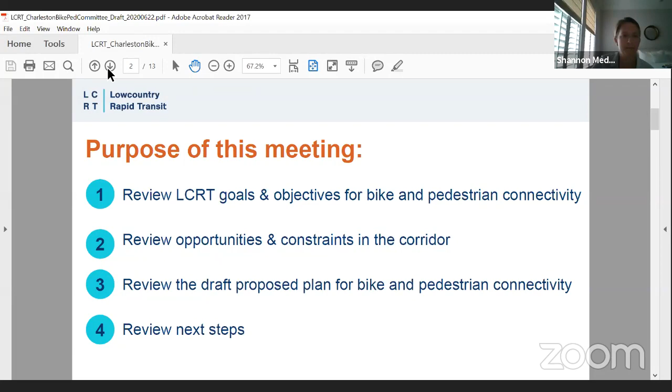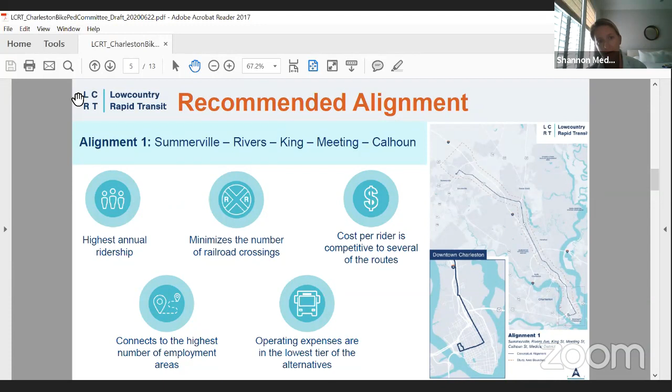Great, thank you, Shannon. Good afternoon, everyone. Thank you for the opportunity to be here. I wanted to go over the recommended alignment based on the purpose and need of the project and the goals and objectives that were developed.

We evaluated several alignments, and the recommended alignment that we've shared and gathered input on from the community is Alignment 1, originating in Summerville, traveling down Rivers Avenue, continuing through the King Street extension, down Meeting Street to Calhoun Street, heading west into the medical district there in the peninsula.

This is the strongest overall corridor in terms of overall ridership, minimizing the number of railroad crossings. The cost per rider overall was quite effective for this alignment. It connects to a number of employment areas, and the operating expense was also quite reasonable compared to all the other routes.

You get to see in the inset there sort of the alignment in downtown Charleston as part of the overall map.

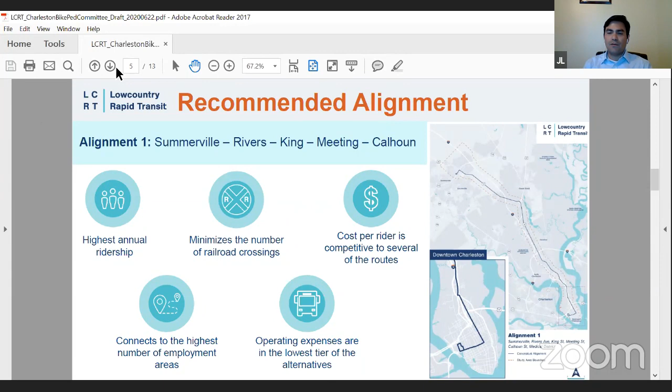So that's the alignment, and related to the overall goals for bike and pedestrian connectivity: as part of this effort, we want to provide safe accommodations for bicyclists and pedestrians along the Low Country Rapid Transit corridor. Right now, we're proposing to connect with bike and ped improvements from the peninsula all the way to Rivers Avenue, University Boulevard, north of the study area.

The intent is also for the bike and ped effort to be a catalyst for future bicycle and pedestrian improvements along the corridor itself, able to branch out for future improvements and connect to the bike and ped improvements proposed for the Low Country Rapid Transit effort, and lastly, to effectively connect the bicycle and pedestrian network to station areas overall.

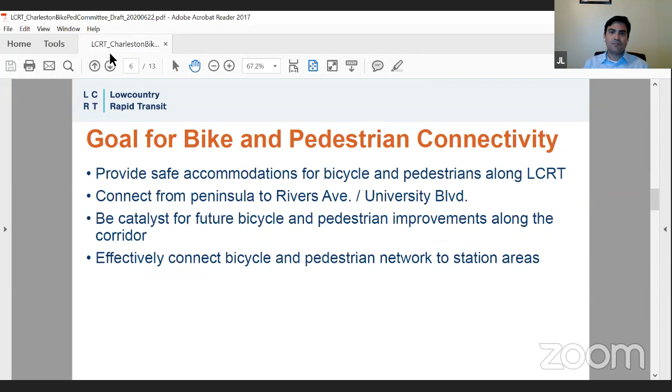So what does this mean in terms of the alignment? As you saw, there's one single alignment that we've identified. These are, if you will, the cross sections of how the roadway would be modified to serve and connect with the Low Country Rapid Transit effort.

Going from north to south, from Summerville into the peninsula, along the North Area 1 from Summerville, the BRT would be traveling in mixed traffic. As we start getting into the Trident Health area, we would have peak direction reversible lanes traveling in the median.

And as we head into the center area, towards North Charleston to about the neck area, we would have center-running BRT. As you see, both northbound and southbound direction would have a BRT serving that facility.

And pertinent to our conversation here, as we're entering the neck area, we would be traveling, as I said, on the King Street extension, connecting into the peninsula via mixed traffic. In the peninsula area itself, on Meeting and Calhoun to the medical district, it would be a peak hour reversible lane traveling overall in that area.

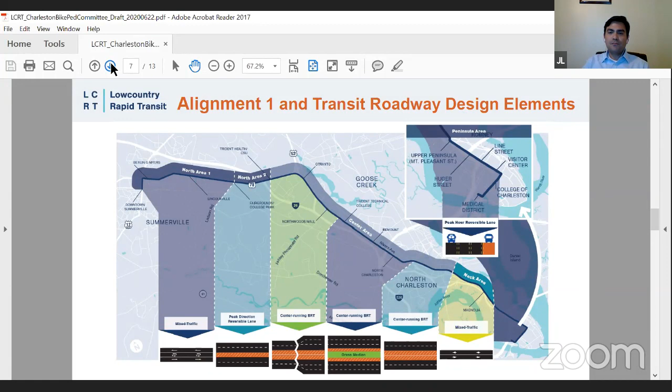And here I'm going to hand over to Kat Maines. She is with Alta Planning, and we'll be focusing, more pertinent to this body, on the improvements planned for the neck area and the peninsula area.

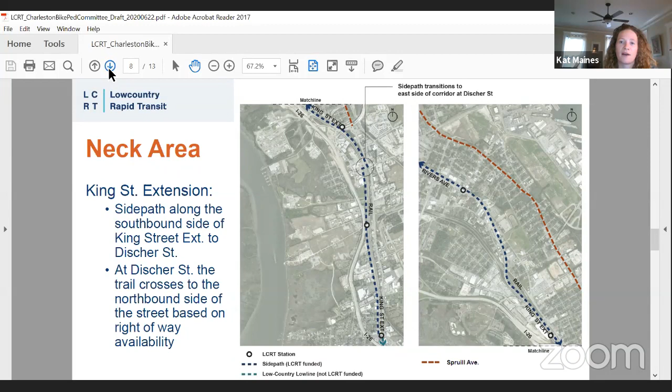At the very top of this diagram you see the blue line, which is the continuation of the side path on King Street extension. We also see an opportunity with the Low Line coming in, taking advantage of that really high comfort bikeway.

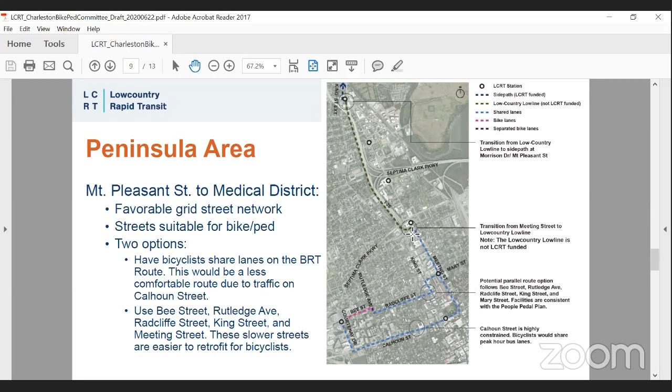The bikeway concept would continue down Meeting Street. This area is significantly more constrained than other parts of the corridor. Charleston is a unique area, especially on the peninsula, with tight right-of-way, lots of pedestrian activity, and historical resources that are non-negotiable in terms of moving them.

While the LCRT route continues down Meeting Street and Calhoun Street, there isn't a great way to accommodate a comfortable bikeway on those streets without significant investment and traffic lane removal, essentially road diets and changing how traffic operates there. Calhoun Street is one of the busier streets for getting people in cars into and out of the peninsula.

So we're considering some options for how to accommodate bicyclists on Calhoun Street. Regardless of what infrastructure is built elsewhere, Calhoun Street is still likely to have some bicyclists using it, so we're looking at options like great shared lanes sharing with transit vehicles and general traffic.

We're also considering other options that would change traffic a little bit. We know the People Pedal Plan designated a cycle track for that route, so we're considering the feasibility of how that could be accommodated and what impacts to traffic that would create.

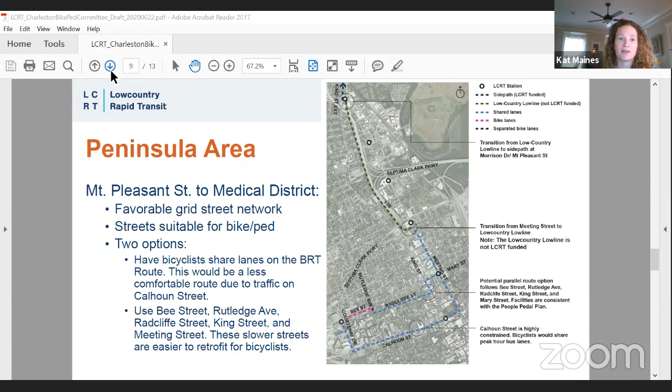So we see that as an obvious solution, maybe having less impact than what would need to be done on Calhoun to accommodate a really great bikeway. Next slide.

This is the short-term cross-section typical of most of the corridor. This isn't likely what it will look like along Meeting Street or Calhoun; this is more for north of where it connects from the Low Line.

We're aiming for a 10-foot shared use path with a 5-foot minimum planting buffer, consistent with national guidance for mixed bicycle and pedestrian travel. Where speed limits and clear zone regulations allow, that buffer could include trees, and it might be wider in places with additional right-of-way.

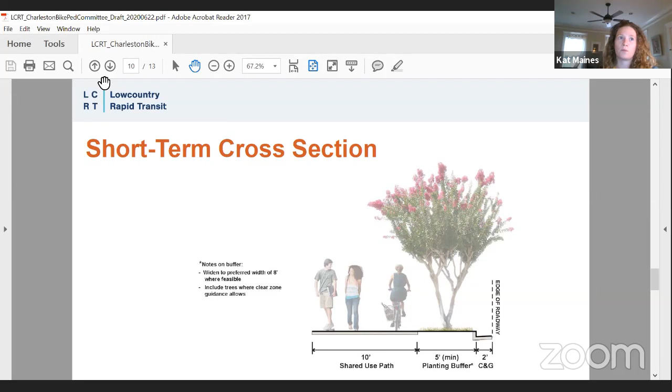For both the shared use path width and the planting buffer width, we want to get maximum width possible, but 10-foot and 5-foot is the typical that will be part of the design throughout the corridor. Next slide.

This shows one of many options for how that short-term cross-section could evolve over time. It could be widened to 12 to 14 feet, or as shown here, the modes of walking and biking could be separated from one another. In this configuration, the initial shared use pathway is instead designated as a bidirectional bike lane, with an additional sidewalk and buffer between those. This might be appropriate where there are long stretches of redevelopment and a lot of activity, where it doesn't make sense to have bicyclists and pedestrians doing the same thing. Overall, there are lots of different ways that cross-section could be evolved in the future.

Perhaps most importantly is getting it onto both sides of the street, where we're only able to get it on one side today. So all this is to say that we are committed to getting this continuous shared use path throughout where the transit improvements are going to be made, but that does not preclude future improvements from happening along the corridor as well.

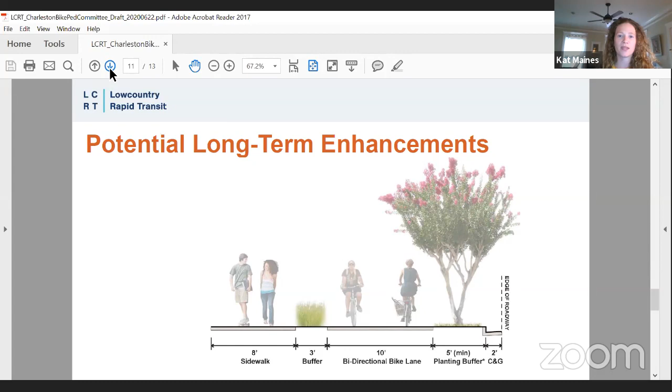In terms of next steps, we'll be presenting the overall final recommendations, this alignment recommendation, to the BCD-COG board. There's still a lot of work to be done in terms of testing and refining the alignment to make sure we're effective and competitive for the Federal Transit Administration Capital Investment Grant Program. This is a federal program with certain targets we have to meet, showing a cost-effective and good project to get a good rating and request federal support for funding the overall project.

We will continue the transit-oriented development effort to refine station areas and advance a TOD study. The bike and ped effort will connect effectively to those station areas for overall permeability, and also connect to the LCRT vehicles themselves. For bicycle and pedestrians, we'll refine the overall network for the recommendations and include them in the design criteria, and the walking and biking access to stations report that we're working on with Alta, Kat, and John there at Alta assisting us. This will include high priority projects summarizing existing conditions and station area bicycle and pedestrian connectivity.

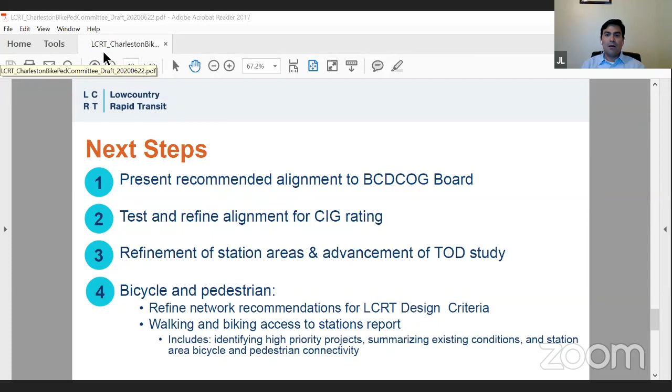I'll just wrap up by saying that we are really just starting this bike ped component, so this is a great time to really hear feedback on what we need to be thinking about as we start to look at this.

Okay, well first off, on behalf of the committee and as chairman, thank you very much for taking time out of your busy schedule to give us this briefing. This is a project that, as I think Sharon will tell you, is near and dear to my heart as a city council member, as chairman of CARTA, as a member of the committee overseeing this, but more importantly, as someone who believes that we need to really look at public transit in this community, and this is the project that's going to really help us do that.

Sharon, before I open it up to questions from the committee, I would like to ask you, since I don't think we've ever talked about this, in terms of your overall budget, is there a breakdown as to what percentage or portion of that can be allocated to the design and implementation of bike ped facilities, or is that just something you all integrate as you go along?

We integrate it as we go along, but we can certainly share with you what we expect it will be for this corridor, if that would be helpful. It's not that they identified a specific percentage that goes toward bike ped. It really depends on the corridor.

I think from this committee's perspective, that's something we're interested in, and we want to encourage and help in any way we can the inclusion and integration of any bike ped facilities that go along. And the fact that you all are using resources and putting resources towards it is a very helpful fact for us.

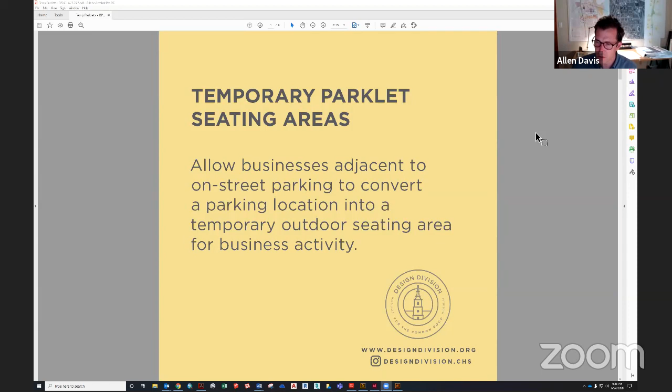So what are we talking about when we say parklets? Right now, Design Division is working on parklets at two scales and timeframes. We're working on a constructed parklet effort, which would involve an actual built structure in the parking lane—a platform level with the sidewalk that comes with structurally integrated barriers from the travel lane.

That's not necessarily—I don't like to use the word permanent because it's not a permanent fixture—but it is a long-term constructed parklet. That's not the main focus of this effort right now for coronavirus relief purposes, but I want to let you know we are working on that.

We've gotten a lot of headway. We brought some designers together. We've identified areas of review that can be streamlined, and we're well underway and happy to talk more about that at a later time.

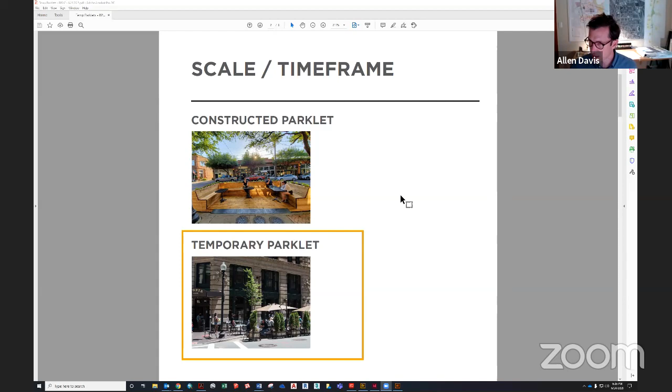We focused on the temporary parklets for tonight, and that's essentially, to be simple, tables and some chairs and sufficient vertical separation or barriers in a parking space. It doesn't get much more complicated than that.

The way we want to deliver this is to use our recent curbside parking program as a template for how to administer this. We're exploring other implementation tools to make sure we're in keeping with legal stipulations and other practices, but that's not really the main focus right now. The main focus is that we've got something to start with and we can build on it.

So what are our recent actions? I mentioned an entire parklet study we're doing. We had an advisory work session where we brought together some design professionals to help work through this, and the design subcommittee met last night. There's been a lot of internal city collaboration on this.

So again, what is the proposed process? We think we can get this done using our existing curbside relief efforts, and that would be sort of an administrative-level approval with oversight from the Director of Traffic and Transportation, administered by a handful of staff.

And then the way that would work is, it's not quite the honor system, but in order to expedite the development of the parklet, it would be a simple application process and a simple field check, something like that.

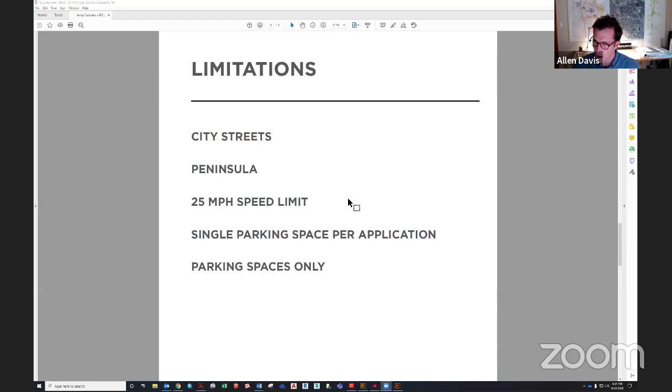And then it's applicable to really only parking spaces, so that means bicycle parking, commercial loading zones, bus stops, places like that really wouldn't be good candidates for parklets. That also limits us to the spaces available. So as you can see, you start to whittle this down. Right now it's a narrow program, but again, once we get this off the ground, we can grow it after some demonstrated success.

Requirements: it does need to be protected on all three sides. The image that I showed conveys that simply. We're having a discussion about the type of barriers that would be needed. Again, they need to be sufficient to deter a moving automobile and keep people safe. So we're working out those details.

It needs to be sponsor maintained. So that means that a restaurant, for example, would be the one to control the furniture and make sure that's locked up, make sure the space is tidy, stuff like that. There has to be a steward associated with this for it to work.

And no spillover would be allowed at present time. So you really don't want to have tables spilling over into a sight distance triangle, an adjacent parking lane, the street, or even the sidewalk, particularly if you have narrow sidewalks. You really do want to contain all the activity in the parklet itself.

And then again, I mentioned the single space per application. That's right now, that's the presentation. And then the document, the sort of working document that we have, really just kind of spells all of that out.

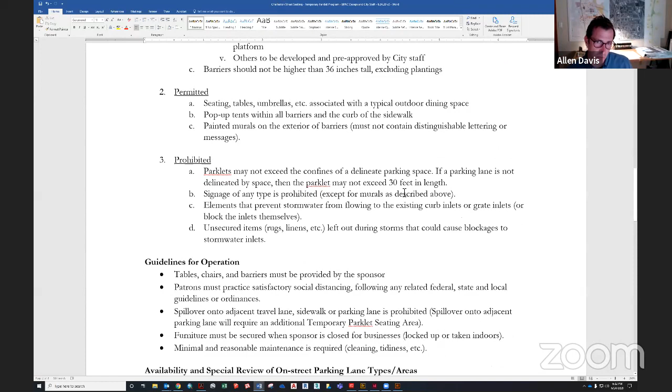I won't repeat it, but we have a pretty clear process on how we think people should apply. A lot of notes in here about liability and maintenance that the sponsor would incur as part of this, so it's sort of an at-risk kind of effort. And then the minimal requirements for safety, some permitted elements that would be in the parklet, some things that would be prohibited that we don't think are safe to have.

Some of this actually came from stormwater. We want to make sure that we're not blocking our drains with some of these temporary facilities. Operations guidelines, again, keeping it clean, keeping it safe.

The types of spaces that are available, we would consider some passenger loading or commercial loading. We're trying to figure out exactly how that works, but it would all be handled at the staff level and the discretion of Keith, the Director of Traffic and Transportation.

Again, more words on privatization of public space and sponsorship. So we've got something off the ground, and I'll ask anyone from the design subcommittee if they want to add anything.

Let me throw some things in before, and thank you, Megan, Allen. One, I believe Councilmember Seekings had to be on a council call, so I think Matt is chair.

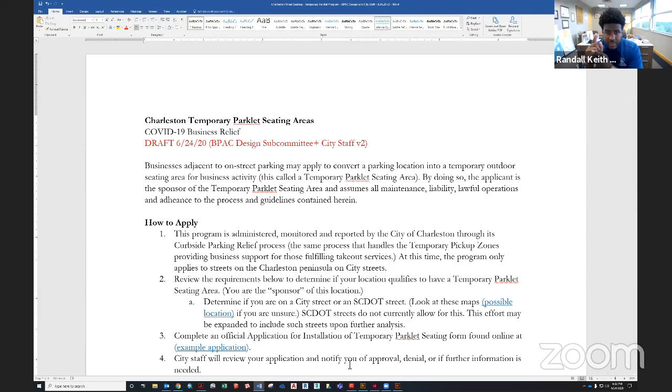We wanted to make sure that we provided you, we colored in the lines for you all post the vote that y'all gave at the last meeting. So that you can verify that these are still recommendations that you want to move forward with, but also so that you can have a little bit more specificity as to what those recommendations look like from a time standpoint, day standpoint, implementation standpoint, and then before we leave this evening, getting a general idea of how best staff can coordinate with chair or others on making sure that you all's voice is clear, the committee's voice is clear when you all present to the T&T committee.